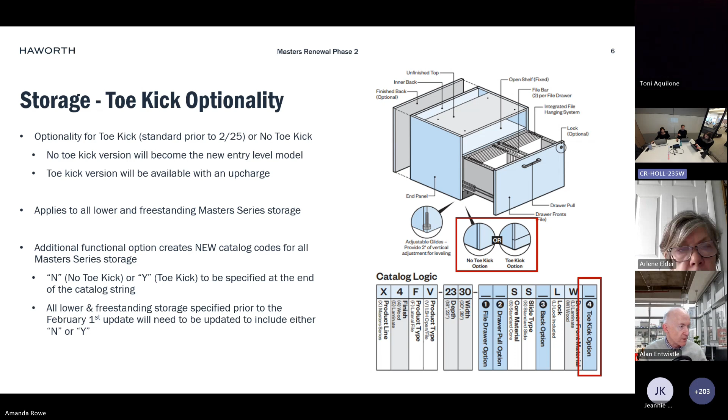And we'll go through a couple more examples of that as we walk through some of these slides, but just so you're aware, with this feature update, there will be some pricing structure changes as well. In all, utilizing the no toe kick option will be the entry-level price point, incurring no upcharges. If a toe kick option is desired, there will be a slight upcharge to the overall product, depending on the storage unit that is being specified. The biggest takeaway here is that the no toe kick model will be the entry-level price, providing the most competitive pricing with an updated, modern, and sleek look.

Due to the new catalog logic that will go into place starting February 1st, any pricing for these storage pieces affected that has been created before February will error out when validated against a date after 2.1. You can see my part numbers in spec have followed the previous logic and therefore will provide an error when I validate against a date after 2.1.

In spec, I have added manually a Y at the end of my storage catalog code. This indicates that the storage will include a toe kick and now matches the updated catalog code. There you can see I've added the Y. And now when I go to validate my pricing within spec against a date after that 2.1 launch, I do not get an error description and the product validates.

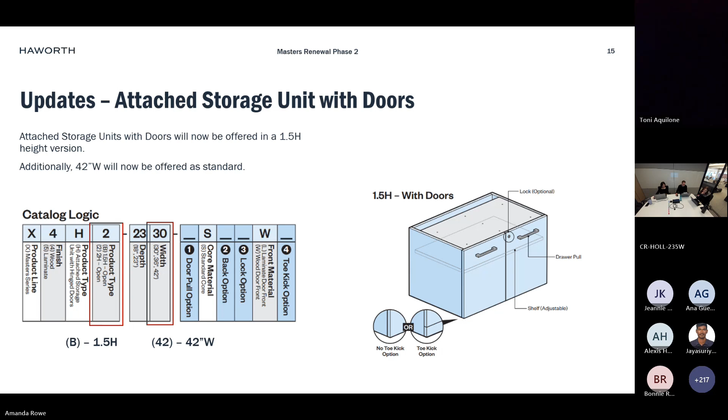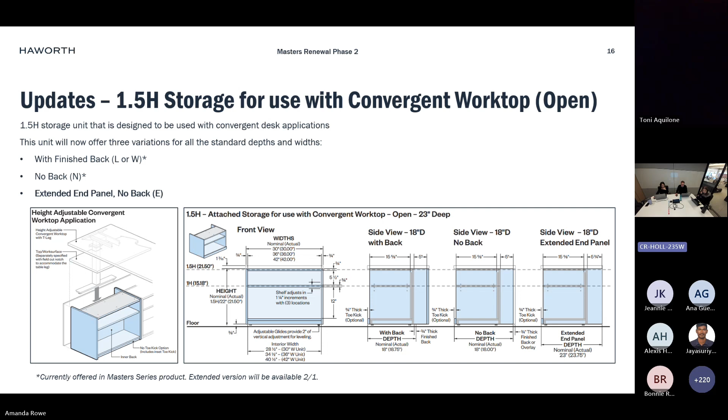Again, what that means is that the case itself will not include a finished back, therefore remaining open to the wall behind it, but will be included at a depth that matches all other storage components that have a finished back. I think it's helpful to understand the planning thought when we're using this item. So let's go through that and kind of go through the thought process a little bit.

The first option would be to specify this unit with an added finished back. This is a great option for when the convergent application may be away from a wall or visible from the back side. It does limit the function of accessing through the case, so it would not typically be used in applications against a wall where you might need wall power access. With this added 3/4 inch panel, you would either have a case that's 18 3/4 inches deep or 23 3/4 inches deep, still providing that convergent cavity, but closed off on the back.

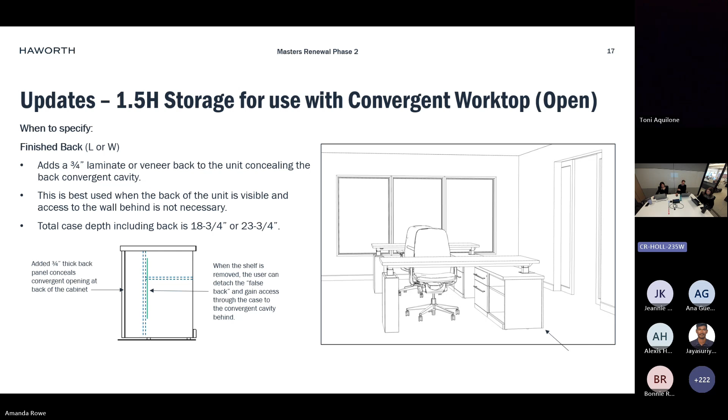The no finished back version is a convergent case that provides open access through the convergent cavity to the wall behind the case, since the convergent cabinet provides access from the front of the storage side through a drop-down interior back panel. So what that means is in that shelf position, you can have that shelf removed, and there is a panel that's screwed into place. You can have that removed and then provide access to the convergent cavity behind it, which we typically would see a height adjustable leg. But then beyond that, there would be the wall where power is typically routed.

While this case is a great solution for applications where it is nested between other storage pieces and therefore not seen from the sides, the 1-inch gap that it creates at the back of the cabinet is not always desired. As with other Master Series storage, when specifying a no back option, the case will either measure that 18-inch deep or 23-inch deep depth to be used with 19 and 24-inch deep tops, respectively.

So now with Renewal, we are introducing the extended end panel option, which provides a cleaner aesthetic when specifying the storage unit at the front of an application or where the ends or sides would be visible from the side. The extended end panel version takes the sides and adds 3/4 of an inch in depth to make this case depth align with other Master Series storage with finished backs. It reduces the visible gap at the back of this case when installed with a credenza top while still providing access through the convergent cavity to the wall behind.

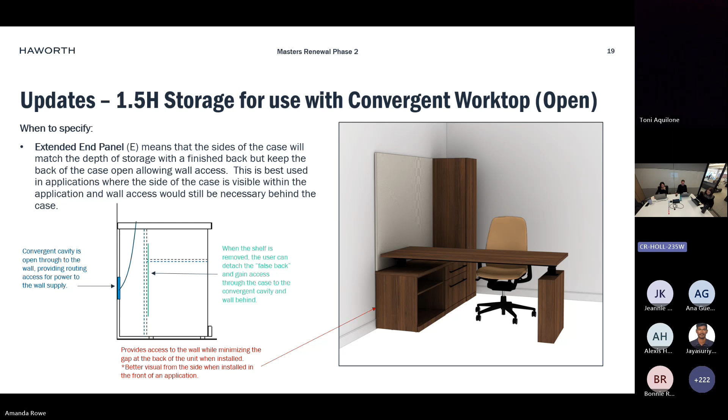This is a great solution for an application like we have shown in the image here, where the cabinet is at the front of the office run or the front of the office typical. Now the desk leg power can route down through that cavity into the wall power behind the case without any little peeking wires through on that gap that used to be there on the side. So it's completely concealed to the visitor side, creating a really clean aesthetic as well.

I think I said that correctly.

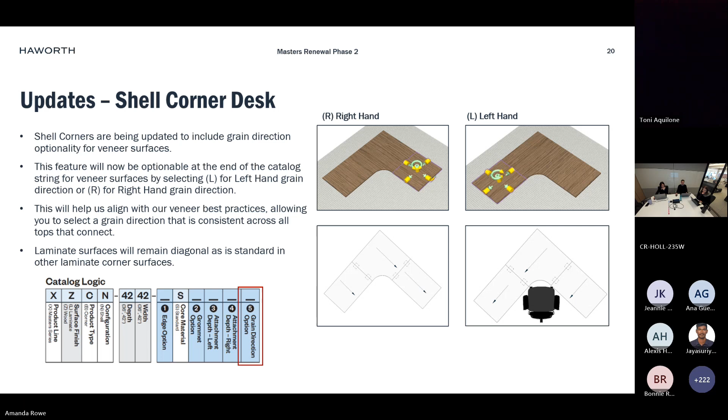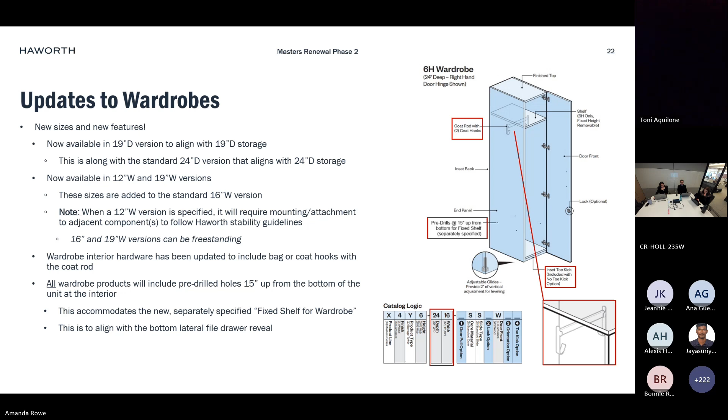So we are launching a fixed shelf to be used within any of the Master Series wardrobe units, which includes any storage piece that houses a wardrobe or valet feature. This shelf will need to be specified separately from the storage unit. It is designed to sit at 15 inches above the bottom of the unit, which aligns with the lower lateral datum line. This shelf is to be installed utilizing the pins that are provided with it and can be used to add more storage functionality within the wardrobe itself.

Pre-drills are provided within the wardrobe unit, and as we discussed on the previous slide, keep that in mind going forward - there will be pre-drills in those wardrobes for this shelf specifically.

When specifying these shelves, it is important to refer to your Master Series specification guide in the price book. This guide will have a chart showcasing the recommended shelf width based on the size and unit you are using it within. Keith will also go into some demonstrations because many of us specify within Canvas, and it's very important to understand how you'll be able to include that. So Keith will go through that in the next section. But just to start it off, the guide will have a chart showcasing the recommended shelf width based on the size of the unit that you are using.

For example, if you are ordering a 12-inch wide by 19-inch deep laminate wardrobe unit and you wanted to order a fixed shelf, you would order the part number XXAS-19-1912, which would fit within the 19-inch deep by 12-inch wide case. At that point, you would receive a shelf that is nominally sized to that, but actually sized at 17 inches deep by 10.41 inches wide to fit within this wardrobe unit.

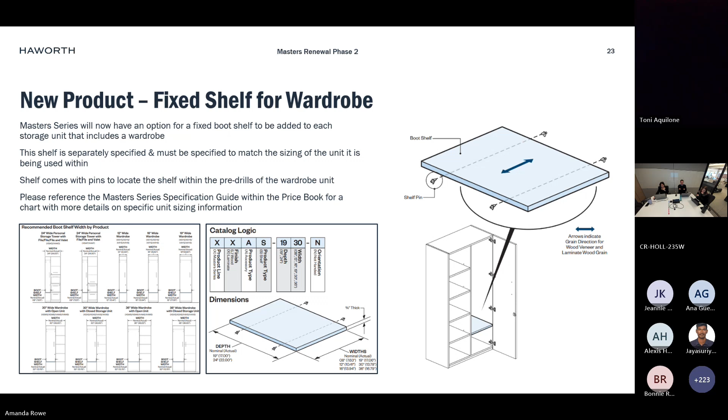All right, so there are some special considerations to go through today. Two of our Master Series products will have different options available at launch. Both the pedestal desks and reception stations will include the option for the painted linear pole only. Blade and wing options will not be available as standard on these pre-configured products. These two components will also only offer a toe kick version on the storage. Due to this, the catalog logic would not need to be updated for these parts to have the extra N or Y at the end of the catalog code.

Due to the linear pole painted option update, you would need to add a finish code for the pole for any linear pole product, which will be placed before the lock ring color code in the finish string. If you should require a pedestal desk with some of these new options, such as the blade pull, wing pull, or no toe kick on your storage, you can work to specify each component separately to create the final desired desk assembly. You can also request a tailored solution for either of these options to add those new features, such as the wing pull or the blade pull.

One additional consideration would be hinged door storage pieces. My assumption is that everyone is pretty familiar with this with Behold, but as with Behold, hinged door storage pieces will not include a blade pull option. This is due to the application of this pull and possible interference that it can cause when opening the doors. Keep this in mind when specifying hinged door storage products like wardrobes and stack-on storage units with doors.

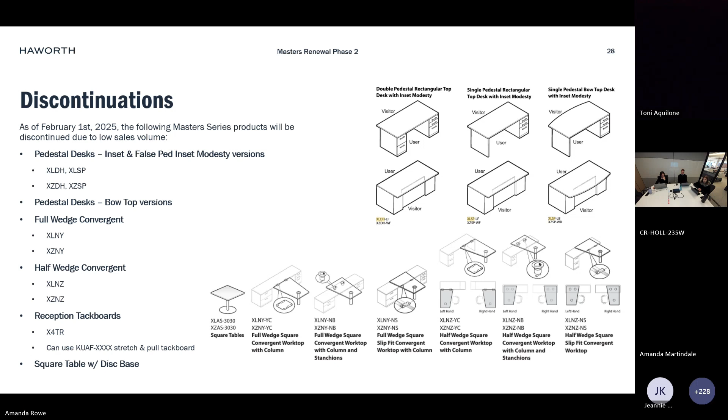All right, Keith is next up. He's going to demonstrate the updates to Master Series within Canvas.

Right, one second while I take over the screen. Oh, where did Canvas go?

All right, so I'll be going in a slightly different order than Amanda went in, only because I don't want to make you too seasick, because I'm going to be doing it all in Canvas. So I'll be sliding along the screen, so I don't want to jump around too much. We're going to handle the stuff she actually stopped with, the discontinuations, first, because they're right at the top of Canvas.

So the ones that we're getting rid of are the full and half wedge convergents. You'll see this is what Canvas will look like come February 3rd. And this, I just took a screenshot of what it looks like today. So you can see this one will be gone, and that handles both the half and the full wedge.

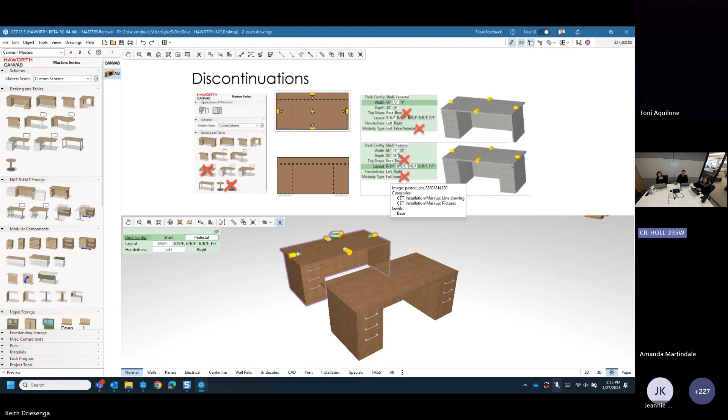And then also the square top disc base. And then inside the ped desks, we'll be getting rid of the bow top option, so there won't be any top shape option anymore because it will only be rectangular, as well as we're going to get rid of the option to choose your modesty type because now it'll only be the full modesty. You won't have the false ped or the inset options.

Note, this does not change any drawings that already exist. So if you have this already specified in a drawing and come February 3rd you download the updates and get this, we are not going to change this over. If you want to remove those options because you didn't order it yet, you can go in and you'd have to click on each one of these and change them back.

But if it came in, it'll come in with that. It'll just give you the model number that was associated to these. So when you look at your calculations or query dialog, it's going to show that that part does not exist anymore. So it's not going to change anything. If you have it in an install, it's not going to go away.

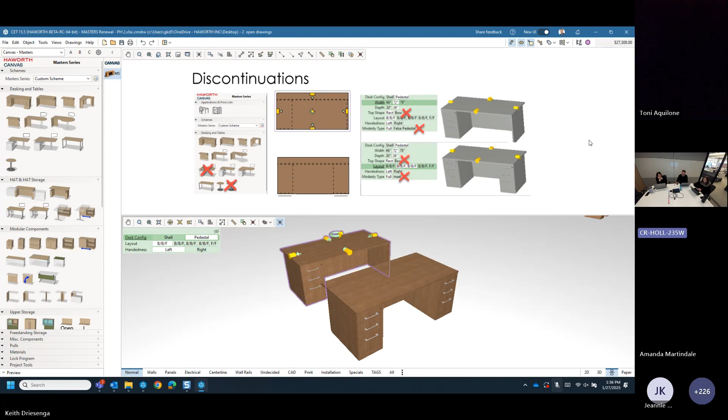So you don't have to worry about knowing what it is once this change takes effect. And that's common with anything that we're doing in here, but there's a couple things coming up. So I'll cover that as well, just to make sure. So I'm going to look at these for a second and cover several different things.

So the no toe kick option in Canvas: anything new that comes in, we are going to default to the toe kick option, because toe kick is the one that previously everything automatically came in with. So the default from now on, new stuff will all get the toe kick. But, like I said with the previous group, if you have it already specified as no toe kick, what is supposed to happen is it's going to change your default in your scheme, because it's going to look at what you had and assume that you want no toe kick because you already have some in the drawing.

So just to match that, it's not saying you can't revert it to toe kick or the no toe kick option. It's just, we don't want you to start pulling in new product because you started this drawing the day before and now you're doing it the day after you updated, and you're going to get all new product that doesn't match what you currently have. So we're going to try to match what you have in the drawing, but with things like this, you always have to be careful, but we're trying to help.

So all you have to do, if you don't want that, the schemes are linked to the insertion of the symbols. So if you change any of those options in the scheme, it's going to automatically change it as your default moving forward. It is an option in the schemes, so you can change a whole drawing at one time. It's also in each individual unit. So any unit that has the toe kick option will have it in the green boxes as well. So you have two ways of changing it, and you can do the mass drawing through the scheme.

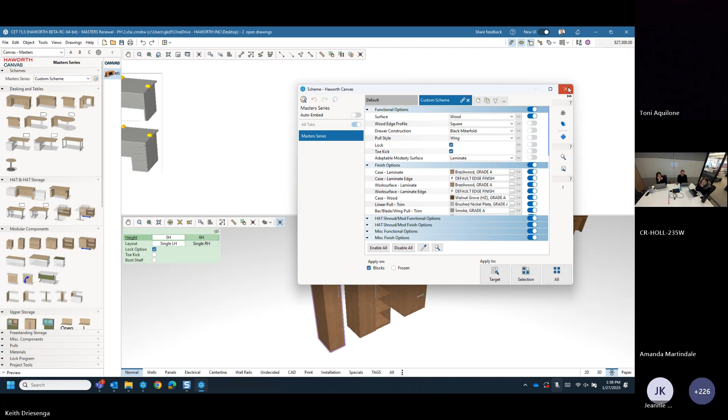And let's see, so moving on. The pull updates. We have added the pulls, and just know we cannot retain the value of the linear pull without specifying the code for the finish; we can't maintain that with the way the code is structured. So any old drawings will now open with the code or the model number for the linear pull with a finish code. Canvas is defaulting everything, because there is no undecided option for the pulls at this time. We're defaulting it now to be the nickel finish.

So if you have it already in the drawing, it'll change the model number, but it will automatically give it the nickel finish. So you're actually getting what's actually in the drawing when you made it. So that should help a little bit. We're not going to change the finish automatically to something undecided, so for an existing drawing it should not mess that up and have you guess what finish it was when it arrived last year. So yes, linear pull, wing pull, and the blade pull. The wing pull and the blade pull are now in the pull section here, and they also have their finish options, as the linear pull has finish options. Is there anything else I'm missing with that?

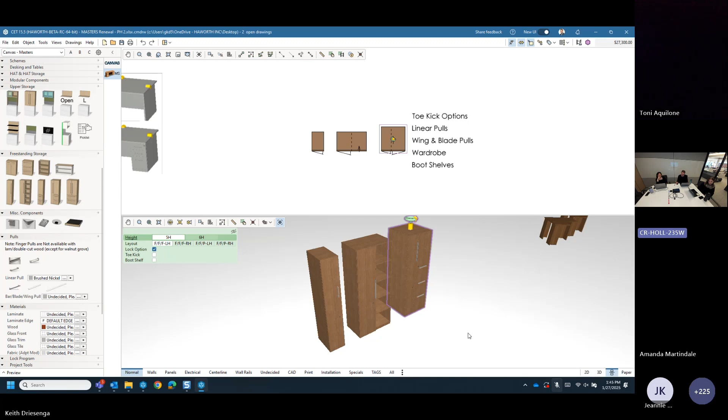Next. So for the grain direction, here is another situation where you might have existing drawings that have the existing grain direction for the wood. If you have old drawings that have the diagonal wood already on it, we are not going to change that when it brings it in, but it is going to keep the model number associated to that. So it is going to error out, but we don't want to decide and change something. So in your reconfigure, you don't know what the grain direction is.

We're keeping it. That being said, if you change this to be either a left or right grain direction, you will not be able to change it back to the diagonal. So if you think you need a diagonal grain direction, make sure that you save one as a favorite in the back. You'll be able to do all the same things. All the options will be there. It's just the model number will be the old model number. So as long as you don't change the grain direction, it will keep that. And currently, what will happen, actually, we just found this out last week.

If you bring one of these in through a favorite right now, for February when it launches, if you bring it in as a favorite, it's going to automatically change anything new that you bring in. So if you happen to bring in a favorite this month, it's going to try to make the one that comes in next a diagonal too. We got that already fixed, but it won't be until March. But that's only if you happen to bring it in as a favorite.

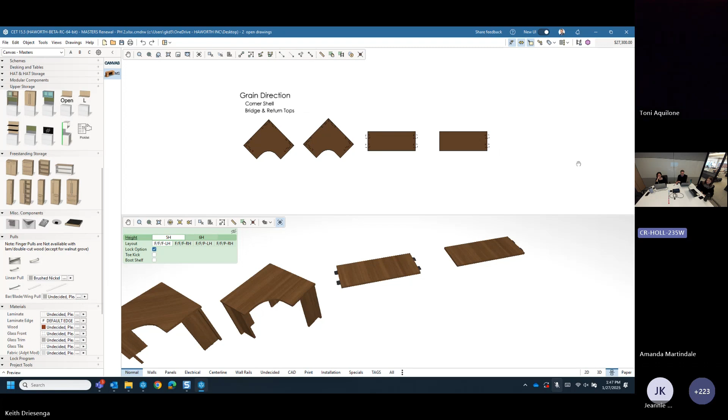And then with the bridge and the return, same thing as Amanda was saying earlier, we added the options to go back to back or back to front grain directions on the 54 and the 60 now. So that should all be working come next week. And then where did these go? Oh, it didn't. I was going to bring them in. All right.

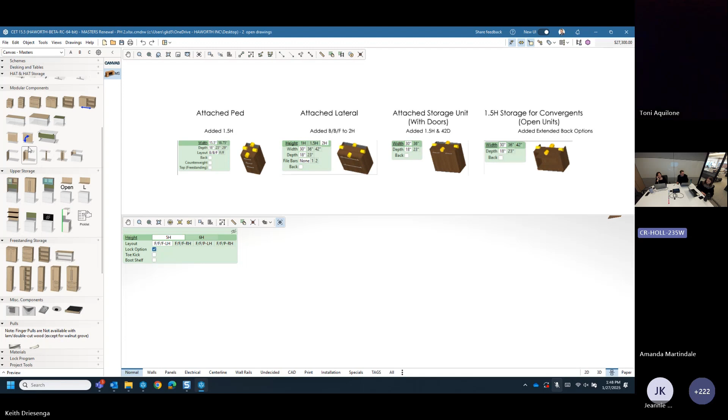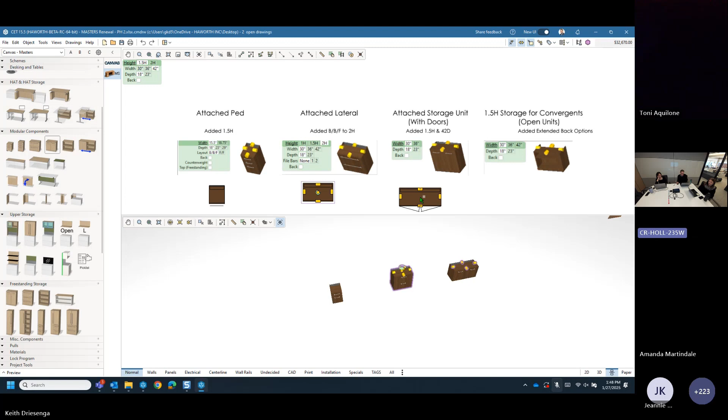For the attached ped, looking at my notes to make sure I'm not getting them wrong. The attached ped was only a 2 high, and now we've added the 1.5 high. So when that comes in, there is now a 1.5 high option, which there was no height option before at all. With the lateral file, we added the box file option. So if you're 2 high, now you have the box file option. With the attached storage units, this one now comes as 1.5 high, where before it did not have a height option, it was only 2 high.

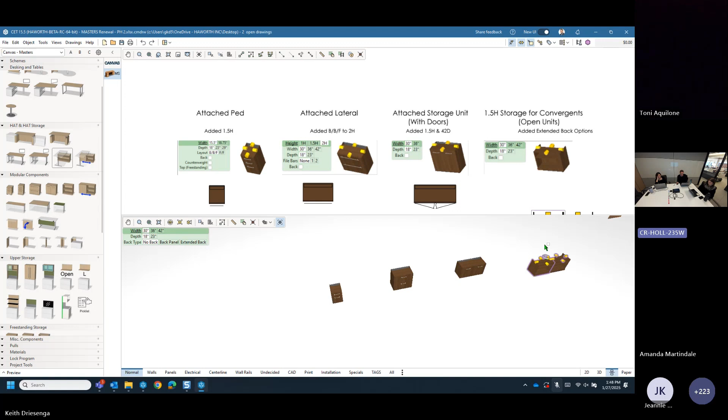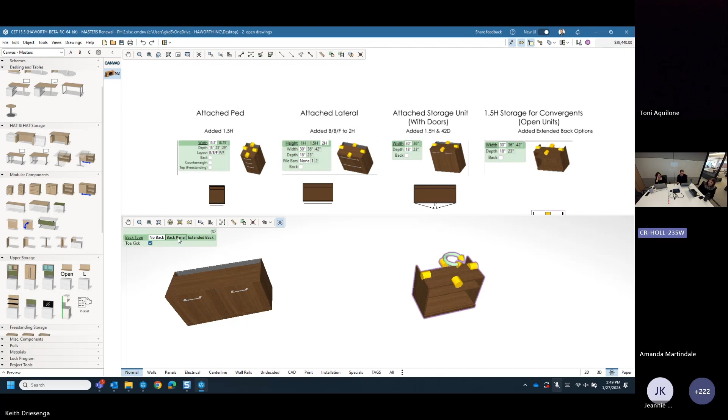The 1.5 high storage, that's down in the height adjustable section, this one right here. This one has the extended back, so now when you place it, before it used to be a checkbox where you could choose to have a back or no back. Now, when you select it, it's not a checkbox anymore, so back is just one of the choices you have. So you have no back, back panel, which just adds the back panel on, or you can do the extended back, which is no panel, and it just goes further back. So it's all in one button. And I feel like I'm running through this very quickly.

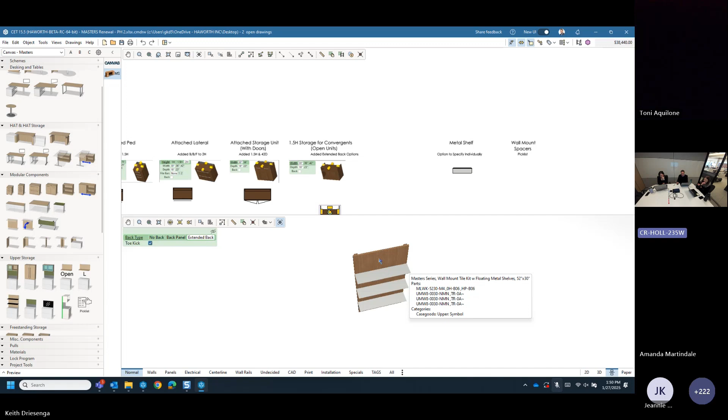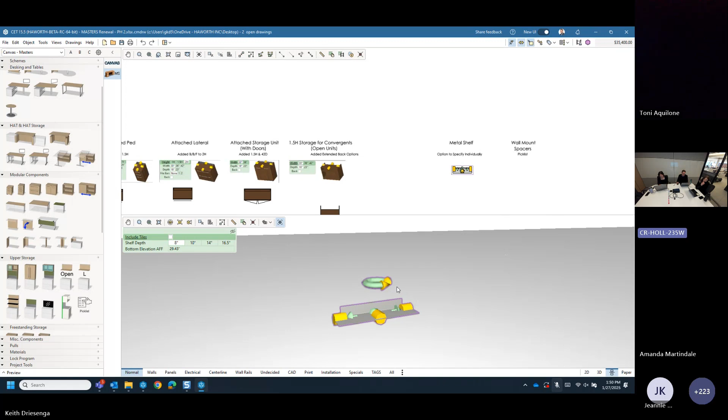Last thing, just a couple things that we enhanced since phase 1 that I just want to cover again. And one other thing too, the metal shelves. When it first was launched, the thought was that you'd never want the metal shelves without the laminate tiles. But of course, day 1, they already decided on Amanda's team that they want to just place the metal shelves. So months ago we added it. It's a little backwards now that I'm looking at it, but to get just the shelves, you have to uncheck the tiles and then you'll get just one shelf. Doesn't matter how many you had, it's going to default it down to just one because we don't know where you're going to want to put them. We assume you're going to want to move them around a bit, so you'll just have to copy this one.

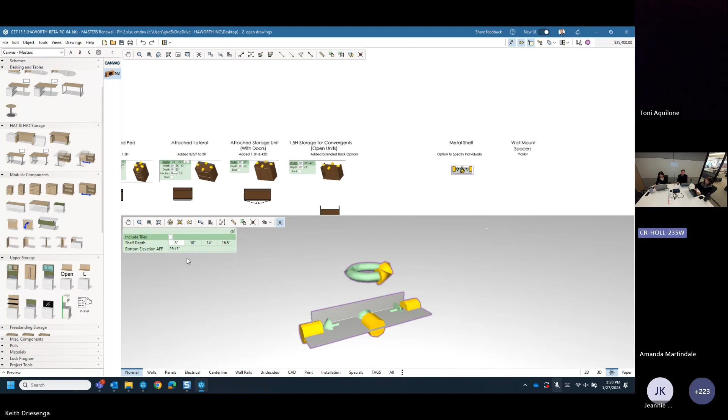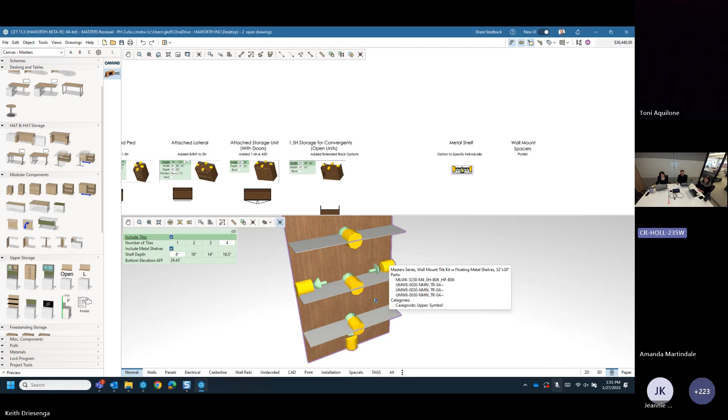It will retain for a while what it had. So if you decide to put the tiles back on, it's going to remember what you had. If you close the drawing and reopen it, it probably won't remember that, and it might default you to something random. But while you have the drawing open, if you accidentally turn them off and then realize, oh no, I've got to turn them back on, it still retains how many tiles and how many shelves you had, as long as you're in the drawing.

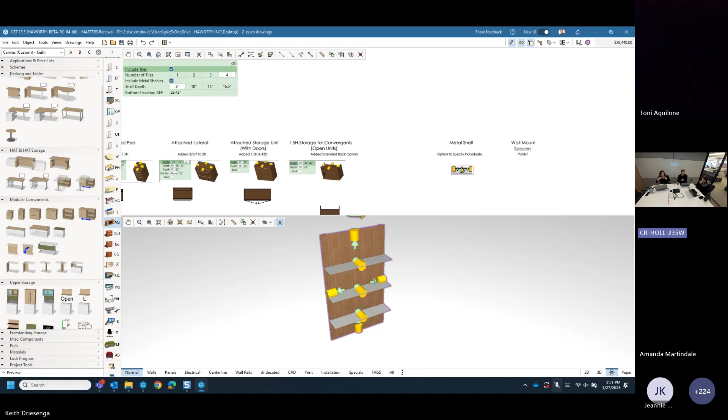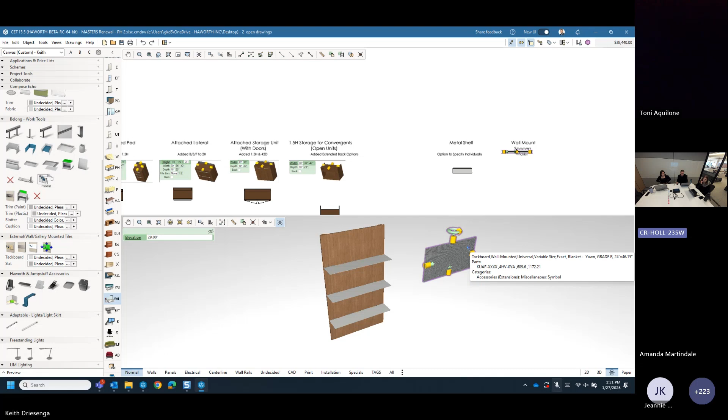The spacer kit technically will be launched come February 3rd, but spacer kits are already launched. The pick list. Yes, the pick list for it. So that was something else I wanted to remind you of, and I'm hoping most people already know that one. We do have the option in the Work Tools tab for the ability to bring in, we keep calling it the stretch and pull tack board, but the tack board that you can make any size you want within the limitations of what the tile can do, and it'll even tell you if it gets too long or too tall with the materials that you had.

But we do not have the ability to put the spacers on this one yet, which a lot of people have been asking for. We're still looking into that. There's some behind the scenes stuff that we're trying to work through with this to get this one actually into the masters tab and create a masters version of this that's closer to masters when you're working.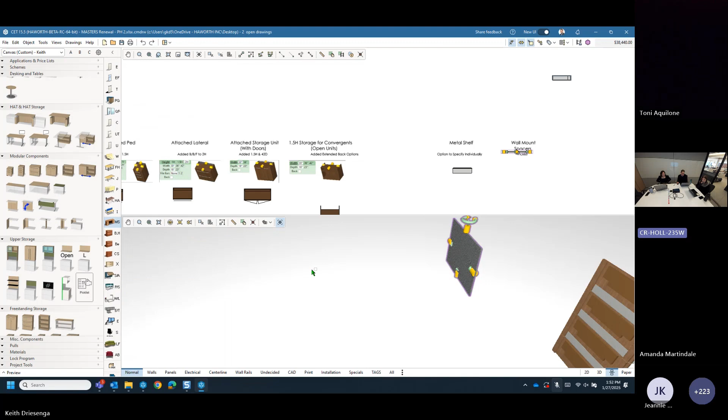But for this one currently, we don't have the spacers, but if you go back to your masters tab, we added a pick list in here now. So you don't have to go searching for it. You still will need to understand the rules, and Amanda, I think, is going to handle this right after this. You're going to have to know the rules of how you can split them up based on the size of your unit or how many that you need, but you don't have to go searching for the codes anymore. We at least have this pick list in here where you can choose.

The pack is how many spacers are in the pack, and then you just need to choose the quantity, and based on the ones you're looking for, we'll automatically put that into your calculation. So it's a little bit of a help.

We didn't draw them. We could have put them in as something you could draw, but then we'd run into the problem where as soon as we do that, someone's gonna be like, well, I want to cut these all up and spread them all over the building, and we wouldn't be able to do that easily. Yep. So better than put something in there that you can't use the best way you want to, we're giving you this so you can at least get to the model numbers quicker. So hopefully that will help, especially with what Amanda will cover next, because that is all I have.

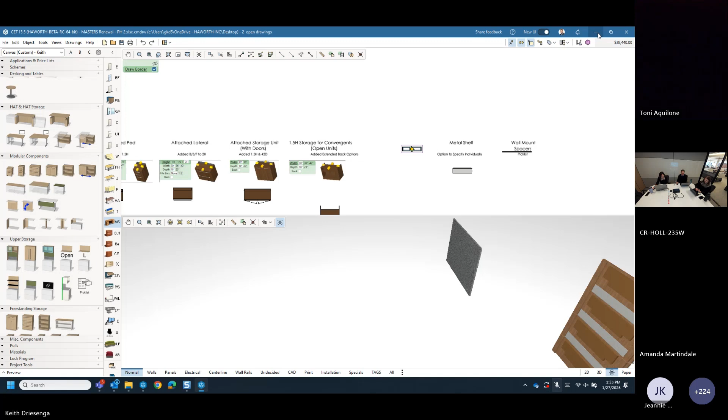All right. Steal the screen back. Never sure if it's going to jump back to the wrong screen or the right one. It went to the wrong one. It loaded for a minute to the right one, and then it was like, oh, just kidding. Oh, I thought that. All right. I promise it would be there fast.

I love it. Okay, so as Keith mentioned, we are going to talk about wall-mounted spacers. So we have this wonderful thing called stretch and pull tack boards, which some of you might be more familiar with the terminology of KUAF-XXX, which refers to the actual part number itself. But with stretch and pull tack boards, they are now able to be used, and we've been promoting them to be used within the Masters private office applications to hopefully reduce the amount of tailored solutions that we require. As Keith mentioned, it is used across the board within multiple product lines.

So not always do the applications that we're thinking of for Master Series or private office apply to what you're utilizing within a workstation or other application. That being said, we have wall-mounted spacers that were launched with phase 1 for glass as well as tack boards. The tack board and glass tile spacers are application specific, and these are sold in kits with a quantity of 2, 3 or 4 total spacers, and a variety of thicknesses. These allow for alignment between wall-mounted components with differing thicknesses. For example, you have them for glass tiles.

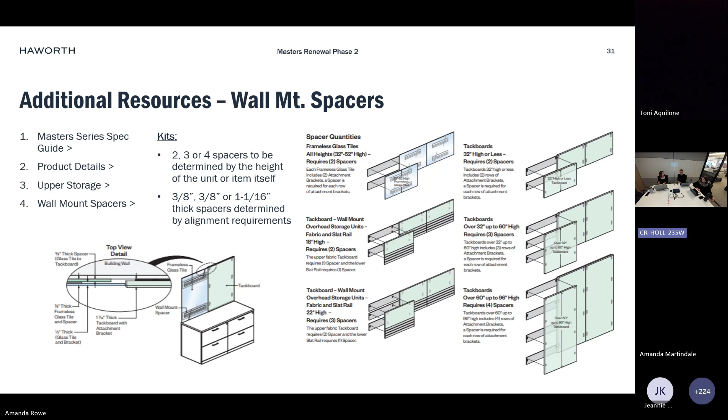If you have any questions during your specifications, I do highly encourage that you consult that Master Series price book and spec guide. There are charts available, as I mentioned. You can also reach out to One Touch Designer, and you can also reach out to HADT if you just need a confirmation that you have it specified correctly.

All right, so Keith mentioned this wonderful stretch and pull tack board. Thank you for showing them where it was. At launch, we'll be releasing an updated and revamped version of the price book for Master Series. With the September 1st, 2024 launch of phase 1, that was released as an addendum to the Master Series price book. Now, with the 2/1 launch, we will have a brand new updated Master Series price book.

So for those of you who are like me and download those items and save them on your desktop, make sure you update that on February 1st because there will be some exciting new things in there and it is revamped to look more cohesive and follow some of our other price books. So the structure is a little bit different as well. It will include helpful spec details pertaining not only to new products, but also to some of those existing products that maybe we have questions about.

Stretch and pull tack boards are one that we get quite often. How do I know I have the right size? How do I know what size to specify? Why wouldn't I just go back to utilizing tailored solutions? Well, our whole goal is that you have the ability to do this on your own quickly and simply, which is why we have the stretch and pull process in place. Knowing that the stretch and pull tack boards have been out for a bit now, we have now included a chart with a recommended sizing based on the application.